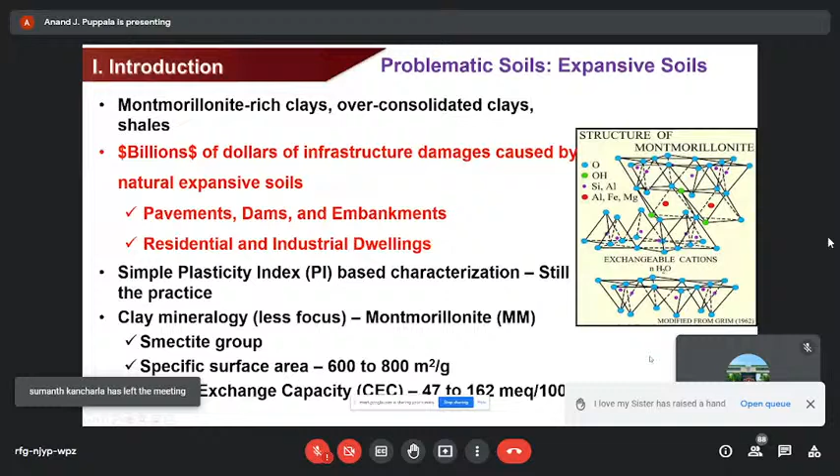So these are some of the infrastructure damage you typically see. And most of them are coming from the Texas area, because we are sitting right on top of expansive clay soil. So we have a lot of damage here. Road cracks can be this wide. It could be anywhere like 5 to 7 centimeters, and then it can go up to almost 0.6 meters or even higher. Whenever the rain hits this area, the water goes into the cracks and causes huge amounts of failures.

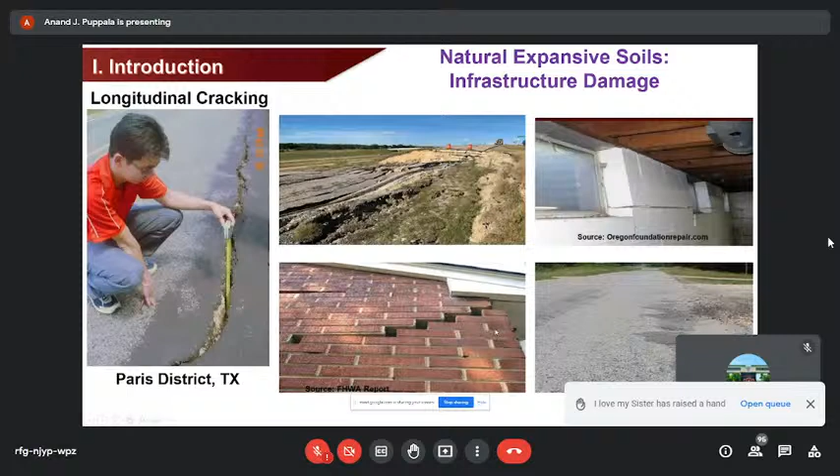And you also see in the home foundations, in the basements, and also masonry, significant differential swelling causes huge amounts of cracking, like you see here, the brickwork kind of moved, and then you have huge amounts of distress in your home. We not only have that issue, we also have it sometimes on the walls, particularly this wall, which is actually close to my old university.

As you can see here, when we had a huge amount of rainfall in a short duration, this whole thing got soaked under the water, and then it became like a frictionless soil surface. So this whole thing slid on top, and you can see that all these panels kind of broke and then came down.

And we also have a lot of areas with MSE walls. Even though behind the wall you have a non-expansive soil, behind that you have a natural clay, which can be expansive. So sometimes this swelling from the rain can cause movements of the walls. I have seen the walls moving into the roads, causing a lot of buckling of the roads. So this is also another major issue.

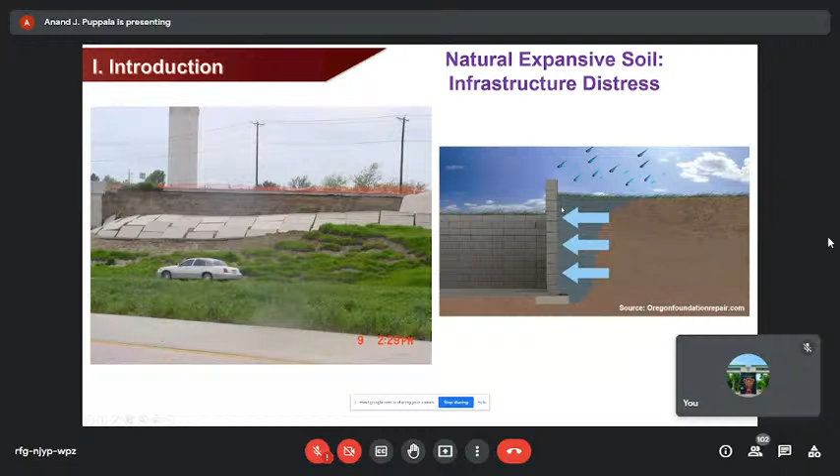So we need to understand what type of backfill or what type of natural soil you have. If that is expansive, you need to make sure that you have some compressible medium here, so the compressible medium will absorb the swelling of the back soil. Otherwise, eventually this will put movements on your structure, in this case the MSE wall, and that can cause huge amounts of failure.

And there are also a lot of dams in our region. What you see, this is one of the dams here. On both sides, you have a lot of slope failures.

And you see the slope failures are very shallow, superficial slope failures. Sometimes the slope failures take away the roads, like you see here. So this is a common occurrence because our soils are highly shrink-swell or expansive soils.

So in extreme summer, particularly from June to August, we have high amounts of sun and also high temperatures. It causes a lot of cracking, and then the rainfall that goes in causes these localized failures. And this is a major maintenance issue for the agency that manages this infrastructure.

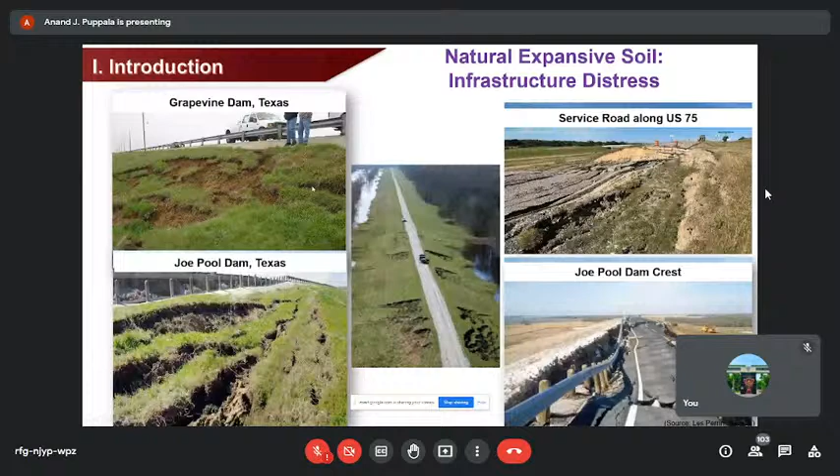So this is a TxDOT highway outside Dallas Fort Worth, and these are all the dams in Dallas Fort Worth. It's a common occurrence of this type of failure.

I also want to bring up another type of expansive soil problem. This is what we call sulfate-rich soils. Up to now, whatever we talked about is mostly smectite soils. But you may have a good soil, but if the soil contains sulfate, it's called sulfate-rich soil. This also causes a lot of problems, and this has been one of my research areas.

It started with Jim Mitchell's work. Then Dale Hunter did some work in Las Vegas. Then Dallas Little from TAMU and other people are working. And now we are continuing this work for the last 15 years, working on different types of sulfate sources.

Most of our soils are gypsum. Gypsum is calcium sulfate. We also have sodium sulfate and magnesium sulfate, which are the two other types. But the majority of the soils in our region have calcium sulfate, or gypsum. The problem with gypsum is it has very low solubility. It is a slow release of sulfates. It doesn't come quickly, so the problem can slowly start happening.

It doesn't happen overnight. It takes several days or several months, depending on how much rainfall dissolution is happening. So that is always important. One way you can tell if you have gypsum is that gypsum looks like crystals, almost like diamonds. You put the soil against sunshine and it will shine. This is one way to know whether you have gypsum in your soils.

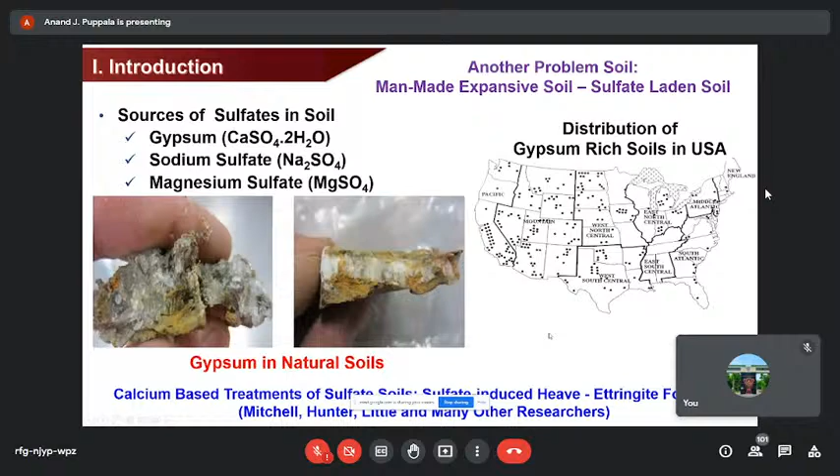So if you have this gypsum material and you stabilize with lime or cement, they form a compound called ettringite, and that ettringite is a heaving mineral. So soils that are naturally low expansive will become expansive just because of your chemical treatment reacting with the sulfates.

You can see here, in this area, a lot of sulfates, the white stuff, and this one here. When you stabilize the soil with lime or cement, the soil starts heaving because the gypsum causes a reaction forming ettringite. You can see some of the pictures here.

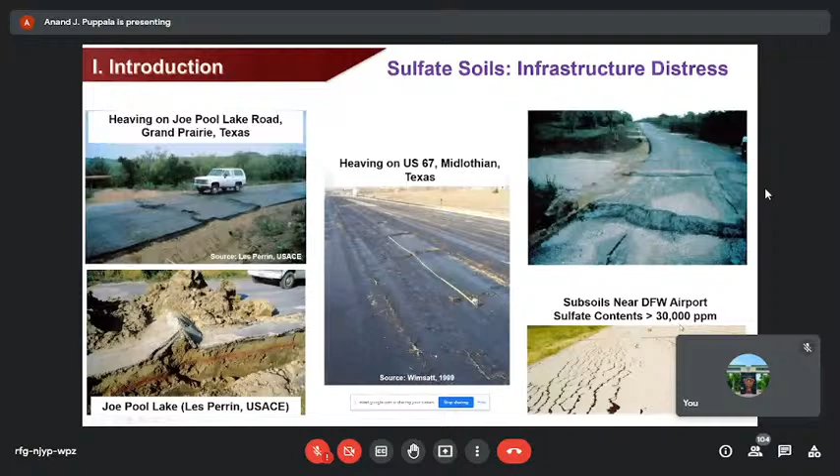And this is actually the taxiway of an airport. This probably also got this problem. In this area, we found very high amounts of sulfates. So this is also a major issue.

I told you we always use PI to see whether the soil is high PI, highly expansive. But I mentioned several times that the same PI doesn't mean they're the same soils. Here there are two soils. They have similar PI, but you'll see that they're different, and one soil is actually stronger than the other even though they have the same PI. If you look at liquid limits, they're different.

But unfortunately, we rely on PI, not liquid limit and PI. There is a liquidity index, and there are other types of parameters you can use. But folks simply use PI-based charts or PI-based equations, and that is going to give you misleading results. On the other side, we also have two soils with similar PI, but look at the liquid limit and plastic limit.

So a couple of my PhD students, almost 15 years back or so, we started working on this fundamental soil chemistry. We looked at the clay minerals. We looked at the soil porosity. And we also looked at the unsaturated soil properties using the soil water characteristic curve, which is a relationship with your soil suction, and that is very important because most of the expansive soils are in unsaturated conditions. So then we also connected all these things into some swell properties.

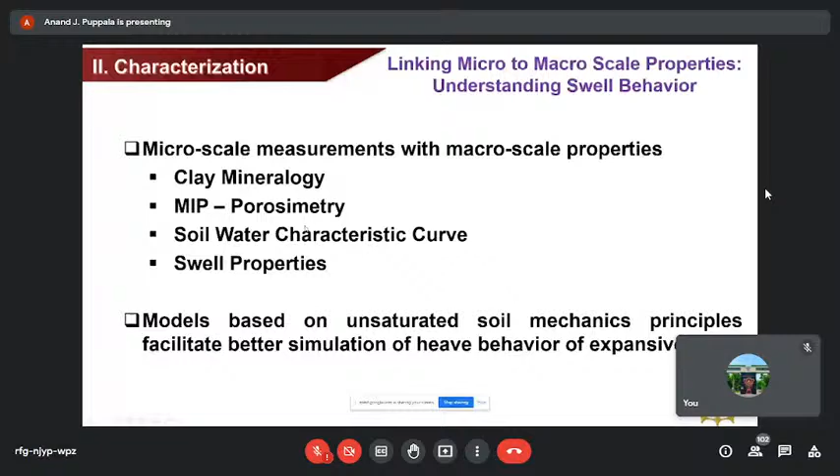Several papers are published on this. I'm not going to talk about them, and we have developed some interesting models combining them. Obviously, using these tests, you have to spend more money, but these will provide you better understanding of how expansive your soil is. So this is basically from Jim Mitchell's book. Everything can be linked to composition and also environmental conditions.

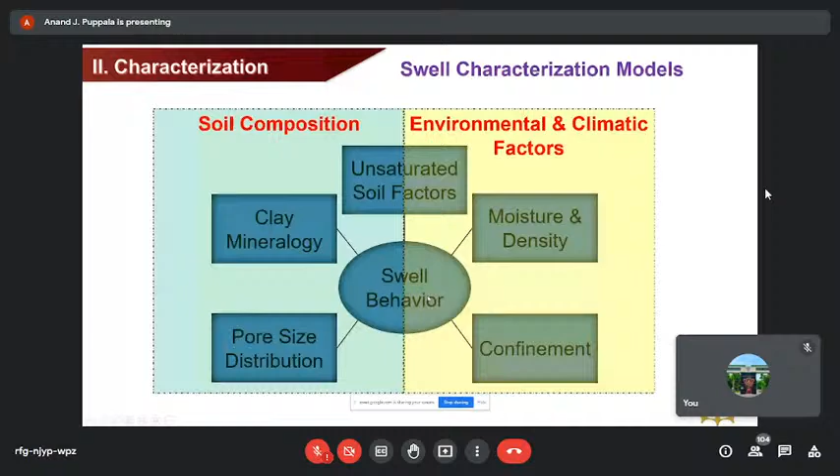So here is our composition of soil types. Here are our conditions outside. Together, they result in different swelling patterns, swell behavior. So combining all of them will be a challenging one. So we tried to come up with a very nice framework where we took the soil, and the soil has sand and silt, and these are non-clay.

This is clay. Even though there are a lot of other minerals, these are the three dominant minerals we consider: kaolinite, illite, montmorillonite, and we try to explain them in a simple way, doing some chemical analysis using these three methods: cation exchange capacity, specific surface area, total potassium. If you look at this paper by Bhaskar Chittoori, published in an ASCE journal in 2011, you will understand how to measure this. Some of you are probably already doing this work.

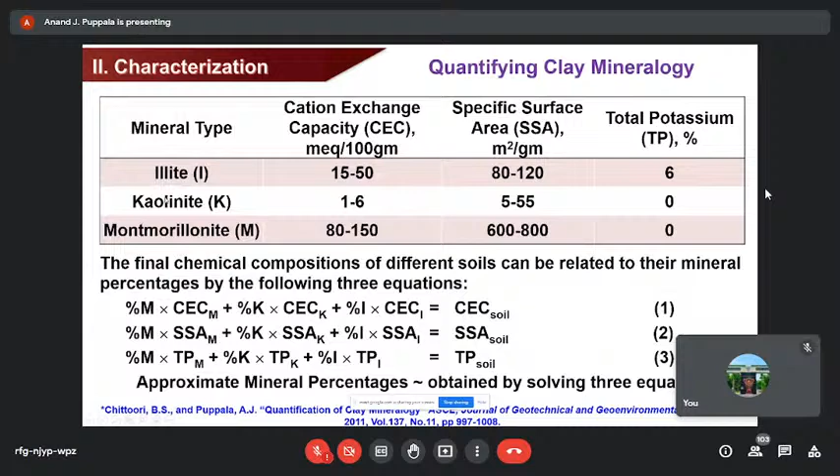So basically, it's three measurements, three unknowns. So you should be able to solve for the different clay minerals. That will give you an approximate, not exact, but that's more than enough. An approximate idea of clay mineralogy in a soil will tell you whether you have too much montmorillonite, or low montmorillonite but high kaolinite. These things will help you understand how much swelling you have.

So we took this information and came up with a chemical mineralogy parameter. You can look into the papers. I'm not going to explain everything; it will take some time. So we gave some mineralogy factors. High swelling, we gave a very high number. Moderate swelling is like a 9. Low swelling is given as 1. So we use these factors. We call it SF, or swell factor. And we multiplied with this equation to come up with what we call a chemical mineralogy parameter.

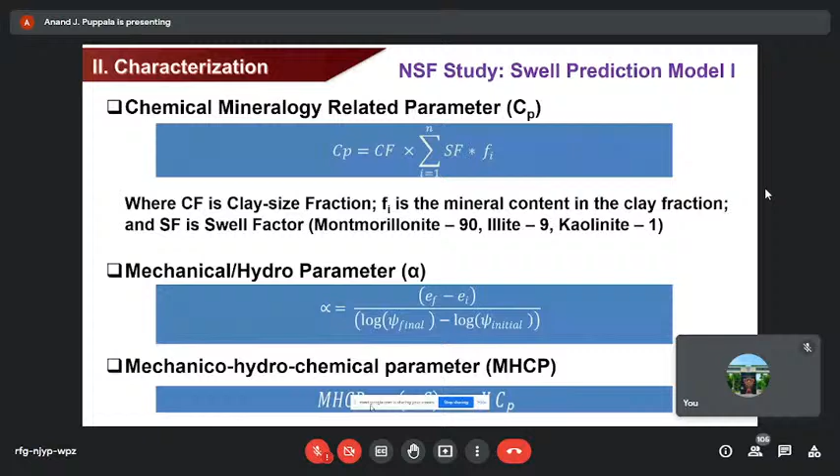And then soil suction, we gave something called a mechanical hydro parameter. This is SWCC, so change in void ratio with respect to soil suction. This will drive how the flow will happen in the soil, because you need moisture flow to induce swelling. And then by combining these two, we came up with a mechanical hydrochemical parameter, MHCP.

We tested several soils, measured these parameters and measured swelling. And there's a good trend. It's not the best R square, but 0.7 is pretty good for geotech. So this is one of the ways we compared them. This paper is published in Engineering Geology. So it's an empirical swelling model.

Again, if you can measure this, it'll give you a better idea of what swelling soil you're dealing with. And we not only measured swell strain, we also measured volumetric strain at different confining pressures, like 7, 50 and 100. So you can see these models we developed are much more fundamental; the soil behavior is incorporated. So they're much more robust and stronger, better in my opinion.

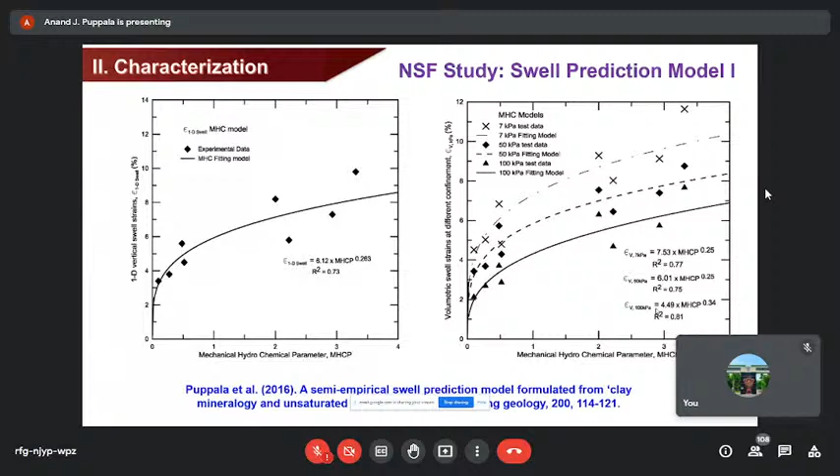So we have developed several models. There's another model, we call it a surface area ratio, because of how much surface area is exposed to the moisture. We came up with a TSAR factor. This paper is also published in the ASCE Journal of Geotech, and this is Aravind. He was my PhD student, and he worked on this for his PhD. And we came up with another model, and it's an interesting model, gave pretty good results.

So this takes extra work. That means you really have to do more chemistry, soil chemistry work, and also some suction testing. But adding more testing is important if you want to know what type of soils you are dealing with, particularly if it's a problem soil. So don't try to solve a problem soil design by doing a simple plasticity index testing in the lab. Just take it in this way. If you have a very problematic condition, you want to invest in some testing. Don't try to do a very simple, cheaper technique.

I remember Professor Madhav used to say Geotech is like health, like a doctor. Same thing. If you want to know what is the problem of a soil, you want to spend a little more on good testing. Like sometimes a CT scan, that type of testing. In this case, particularly what you see is mercury intrusion porosimetry. These are expensive tests, but they can give you a better idea of what type of soils you're dealing with, and that will give you a better design.

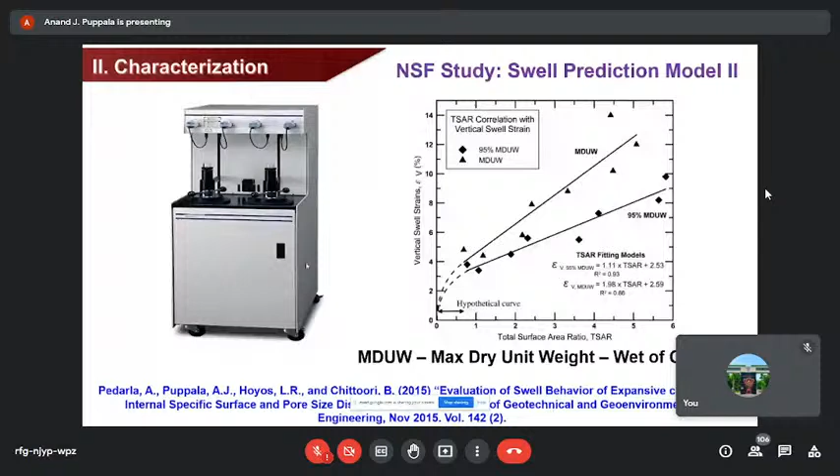Sometimes you get this: we want you not to think in an academic way, we want you to do it a much simpler way, don't spend too much. But then when there's a failure, you will be liable. At least in the US that is a big issue for us. So we need to be careful. We want to test as much as we can, and then use engineering judgment to develop our design. So for the young members listening, try to do more robust experimental work that will give you better confidence in the problematic nature of your soil. Do not try to do a simple thing.

At this point, I just want to mention, this is Professor Ralph Peck. I know Balakumar mentioned him, we talked some time back. He's considered one of the great practical minds. This is one of his quotes: translating the findings of our research into simple concepts and procedures for the guidance of the practicing engineer, in my opinion, is a duty and worthy activity of the profession.

So remember, whatever you do, you need to convert that into practice. Don't just write papers and leave it there. You need to show how it can be implemented into real practice. This is what we call translational research. Everything we do needs to be connected to the design of infrastructure at real sites. That is where you really need to spend effort on these topics.

At this point, I'm going to show you a couple of studies that we are doing on expansive soils, which will give you a good idea of how we are dealing with them. This study is about pavements, roads built on expansive soils, in an area about 45 kilometers from Dallas. Typically when we have expansive soils, we use chemical treatments, mostly these materials. And we also use geosynthetics, like geocells or geotextiles. These are different methods that are typically practiced. Some work very well, some have issues.

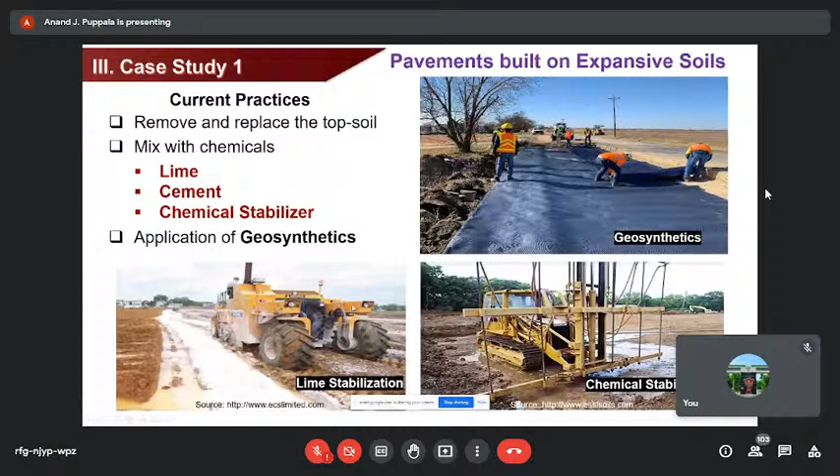We got a project with the highway agency. They want us to know why in some cases it works and in some cases it doesn't. That means if I use chemical treatment in some soils, no issues. Everything works well, the road is perfectly uniform, there's no heaving and cracking. But in some cases, it is an issue. So in the study, we took soils from different parts of Texas, and for each soil we identified how much montmorillonite, illite, and kaolinite using our Dr.

Chittoori's method, the one he developed with the CEC, specific surface area, and potassium. And we approximately identified them. So the ones that you see in the red color font here, like Austin, Fort Worth, Paris, and Pharr, you can see these have high amounts of montmorillonite, close to 50%. This one is 48, but all others have above 50. The ones that are below, we put as dark numbers.

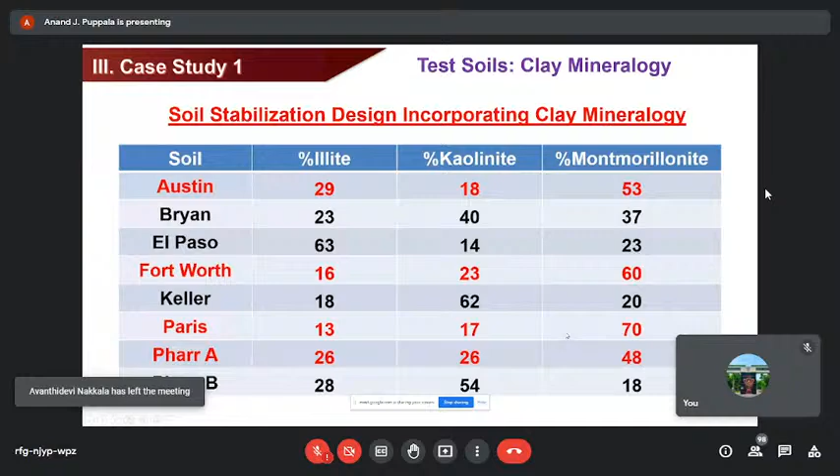And if you look at the liquid limit, obviously the more montmorillonite you have, the higher the liquid limit. So you can compare these two to know that this soil is not as expansive, even though the PIs are similar. So this is what we are trying to tell you: try to use a little bit of chemistry or chemical testing that will provide you better understanding. Using the concept of PI and liquid limit will also be helpful.

It's the same thing with Paris and Pharr. Again, 36, 37, this soil has montmorillonite, whereas this soil has kaolinite. The reason why I'm saying these minerals is you will see later the Bryan soil has no problem when I stabilize with lime. Whereas the Fort Worth soil, if I stabilize with a moderate lime dosage, did not perform well in our testing. So if I know the mineralogy, I will understand it. And that explains why in some areas we have premature soil failures, whereas other areas we have no issues.

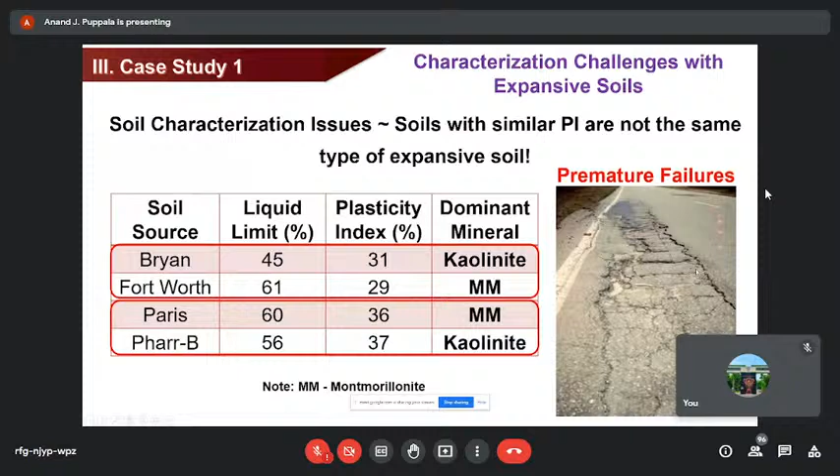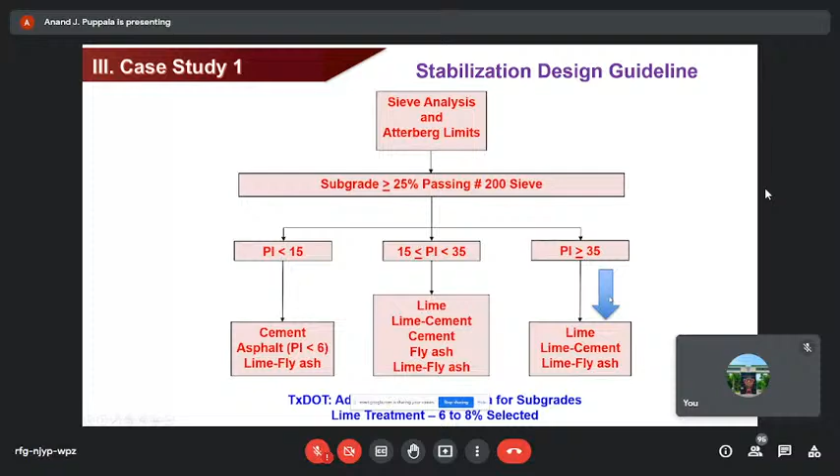So one of the things we did is we looked at the stabilization design. We tried to look at lime treatment using this chart, looking at the PI number. So we used lime as our stabilizer. There's a simple Eades and Grim method you can follow. But one important thing we did is once we stabilized them and prepared samples, we tested them for durability.

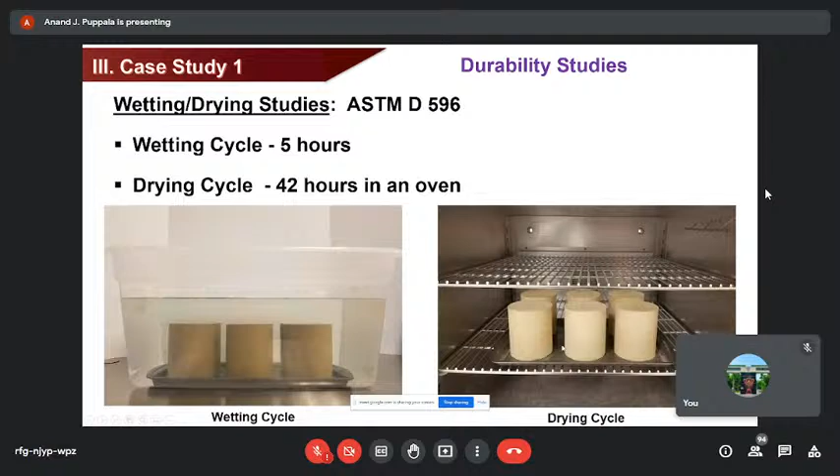For durability, we followed the ASTM method D559, which includes 5 hours of wetting followed by 42 hours in the oven. One complete wetting cycle plus drying cycle is considered as one cycle. Okay. So here is our soil that is untreated. This is the Fort Worth soil. Untreated won't survive too much. Within one cycle, the soil started crumbling.

You can see this is wetting. This is during drying. You can see how much shrinking is happening, you can see cracks. The minute we wet it the next time, it started crumbling. So this is obviously untreated, there's no strengthening. The same soil, when we treated it with 6% lime, worked okay up to 10 cycles. After 10 cycles, it failed. Remember, this is the soil that has montmorillonite in it.

So if your threshold durability is around 21 cycles, or you can establish the number of cycles, this one didn't even go halfway. It failed before that. Because of montmorillonite, this soil only worked for a certain time. In the beginning, it performed well. But with seasonal changes, within a few seasons, you will see a sharp failure. And that is what we learned: looking at the mineralogy and comparing with the durability, we were able to explain what is causing the problem.

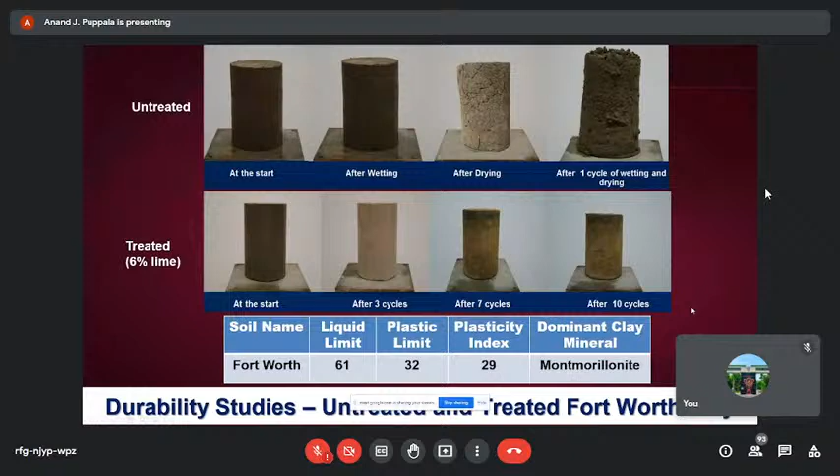But one interesting thing is lime actually failed within around 12 plus cycles, whereas cement actually went all the way. One reason is cement provides more unconfined compression strength, so the increase in strength is helpful in reducing the whole thing. So this is the summary of all our testing of durability.

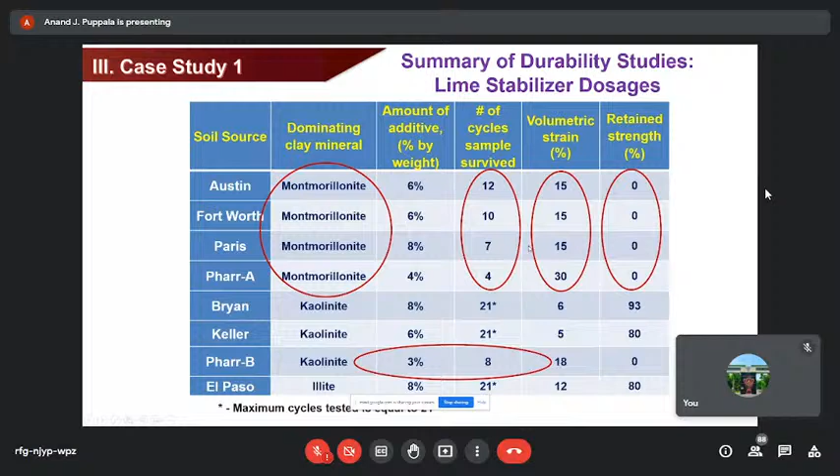So that tells you that for soils that are rich with montmorillonite, you really need to do much higher stabilization or even consider other things. Otherwise, you will have certain swelling problems. So that is one of the things we learned. And then we came up with a modification: check the montmorillonite amount by doing some chemical analysis. If you do have too much montmorillonite, try to increase your dosage, add more chemical dosage. That's not necessarily a good sustainable solution, but you have to increase your strength so the soil won't collapse very rapidly.

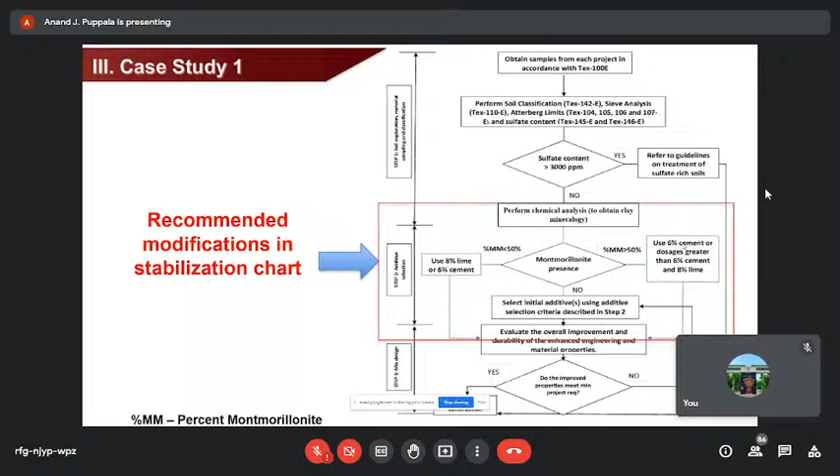So this is one of the things that we tell them. You have so many roads that fail; many countries have this issue. They just use a thumb rule: this PI, go with 6% lime. In many cases, it works because maybe the soil is not necessarily rich with montmorillonite. But in many places where there's too much montmorillonite, that 6% lime thumb rule doesn't work. You have premature failures. When you do this forensic type of investigation, you will know what the issue is. If you ever see any road that failed, particularly a stabilized area, there may be a clay mineralogy issue.

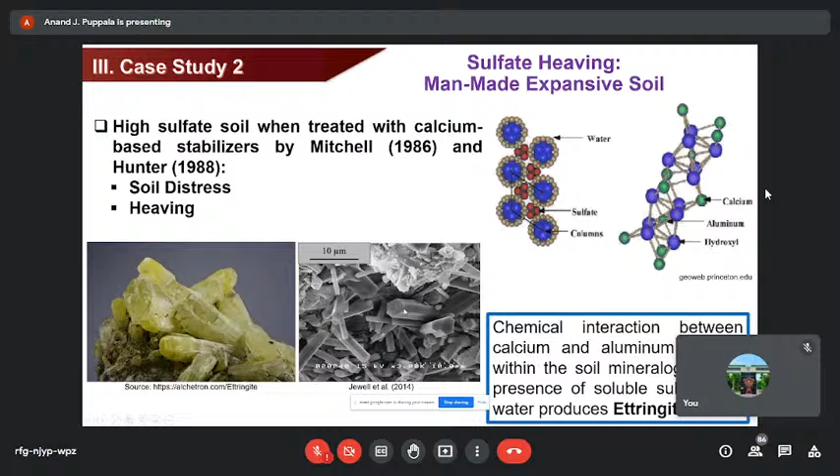The second case study I want to mention is more about sulfate soils, high gypsum. When they react with the calcium in lime and cement, they form this mineral called ettringite. So this is ettringite. It looks like needle-like structures. If you can see the shape, it looks like a hexagonal shape, long needle-shaped structures. So this is the chemical reaction.

So you have your lime reaction. This is your lime, hydration of lime. It releases calcium. And then you have the soil. Whenever you put lime treatment, your pH will start going up. At high pH, your soil starts releasing alumina and silica. Many times these are good things because these are the ones that form your pozzolanic reactivity compounds.

But unfortunately, in sulfate soils, you can see in the last equation down here, you have calcium from lime, alumina from the soil coming from this area, then you have sulfates in the soil. All three, in the presence of water, produce this long equation here. This is nothing but ettringite. Ettringite swells; it bulks up 2 times its volume. Anytime you give water, it becomes like a sponge and swells so much.

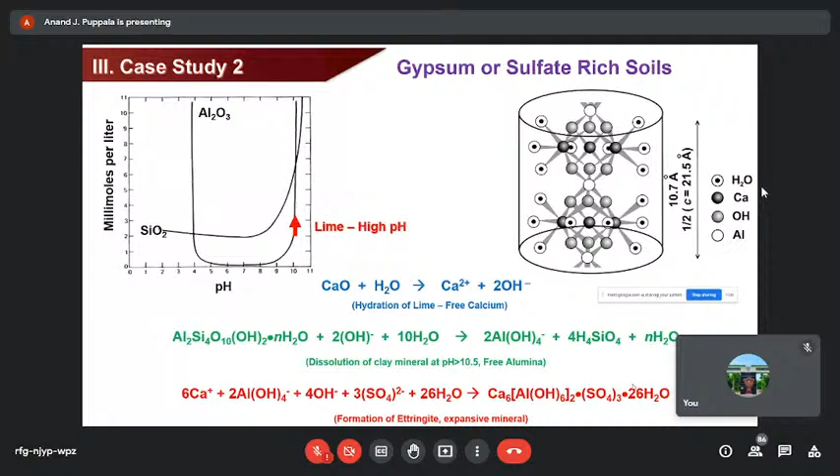So in a soil that is rich with sulfates, when you stabilize with lime, lime is typically supposed to suppress swelling, but instead of suppressing, it actually compounds the problem. That is one thing I would like you to know, that this is an issue. We have been working on this for several years now. I have documented all the various case studies.

In many places we found out ettringite is a big issue. And the other thing is, in some cases it happens within weeks to months, and in some cases it takes years. The reason for that is, as I just told you, gypsum has a low solubility. If it's dry, it doesn't release. But if you have too much rain, that's when it starts coming out.

Gypsum produces sulfates, so that is what's needed. And once you form the ettringite, you need to form more and more. It needs to grow. Only then will you feel this heaving. Suddenly, in some cases 6 months, sometimes a year, sometimes several years, you start seeing this ettringite attack. We call it ettringite-induced heaving, also known as sulfate-induced heaving.

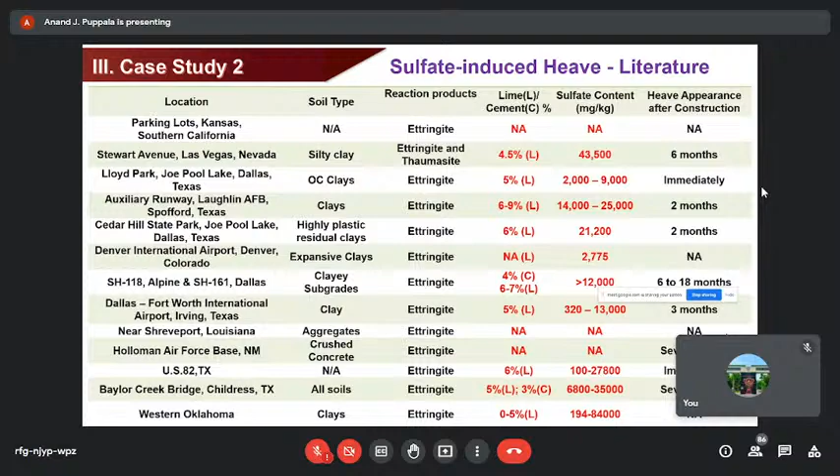So we are very well known in this area. We have published quite a bit on this topic. I divide them into 2 types. One is low to moderate sulfates, I would say 8,000 or less. The other is sulfates more than 8,000. For the first, we have done a lot of studies all over the world with different materials like double liming and fly ash. All these things have provided some good results. We have good information on what works for these levels of sulfates.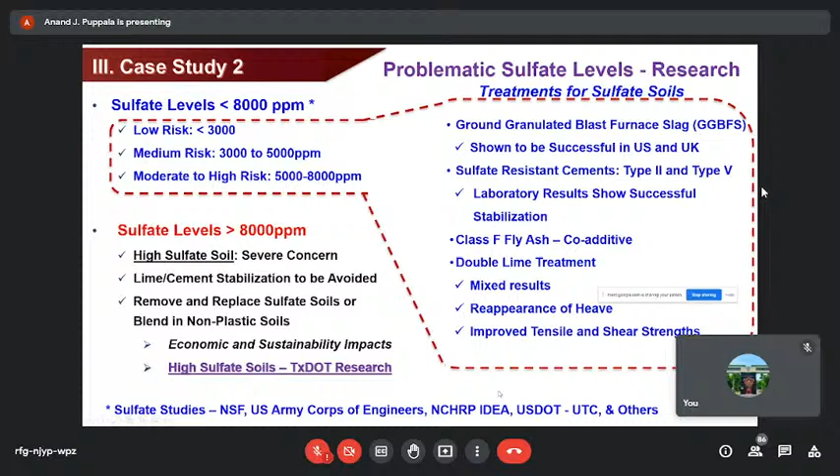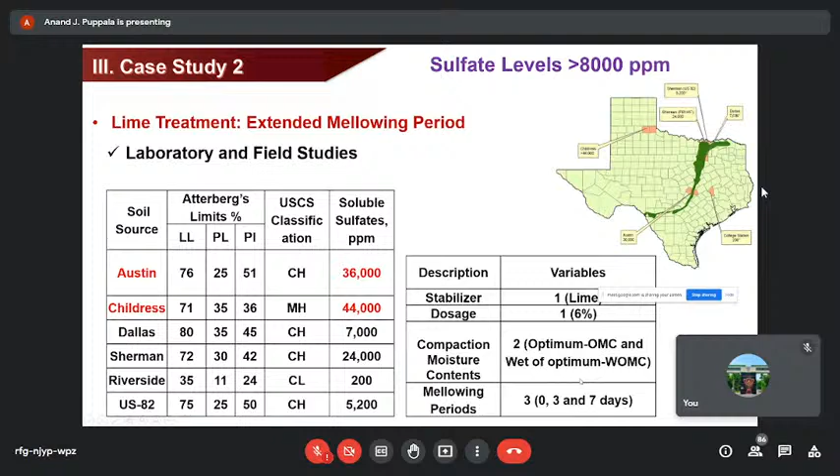So we did 6 different soils. You can see the sulfate levels. Some of them have lower sulfate, but we spiked them by adding gypsum, so that way we got more than 8,000. We added extra for these 2 soils and this one also, so we increased our sulfate levels. In each case we tried lime at 6% dosage, and then we tried different things. One thing we did each time we tested was try different mellowing periods.

So what is mellowing? Mellowing is when you initially mix the lime and the soil, mix everything, and then leave it for a certain time. Typically they do it anywhere between 0 to 24 hours, so that is like 1 day. But we wanted to leave it for 3 days and 7 days, then come back, mix it, compact the samples and test them for swelling. So here you see the 3 mellowing periods we studied: 0 day, which is immediately, and then 3 days and 7 days, this extra mellowing.

What happens is during 3 days or 7 days, the ettringite forms, but we go back, mix them again, and recompact them. So here you can see 0-day has much higher swelling, but with increased mellowing, the swelling starts subsiding. So this is one of the methods we use in the field. When we stabilize with lime, we keep it for 3 days. Contractors do not like it; they like to do everything within a day or two. But if you have sulfates, you have to wait for some time. This is one of the things we learned.

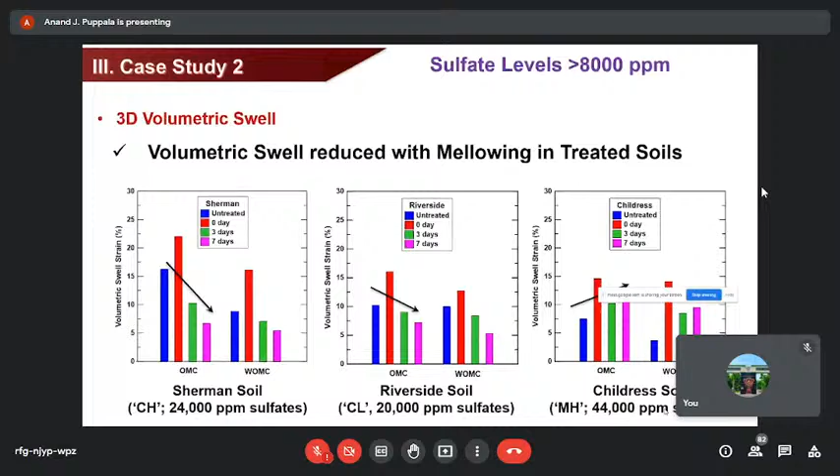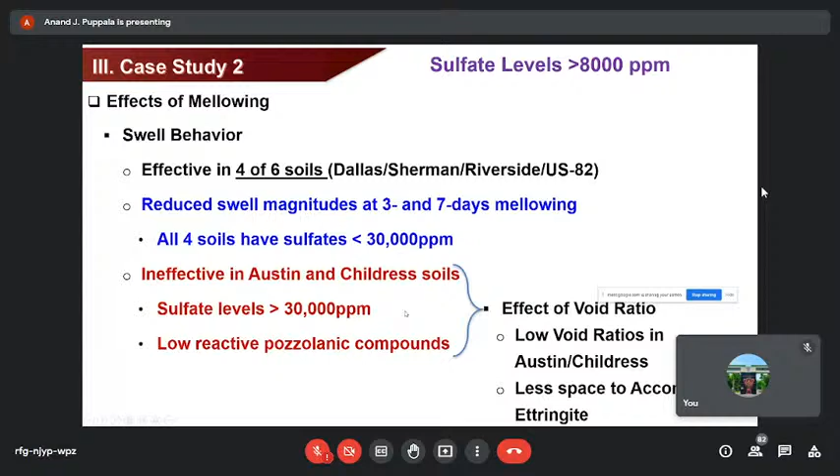Mellowing can reduce it, but it only works up to certain amounts. If sulfates go above 30,000, we found it's still going to be a problem, as you can see here. There's always a limit. So for anything above 30,000 parts per million, you need to remove some sulfates from the soil and then stabilize it. Otherwise they will always cause a lot of issues. We showed that any soil below 30,000 is no problem, but above 30,000 we have an issue with soil sulfate reactions causing more heaving.

And we even studied this in the field. This is a section almost 80 or 90 miles from where our university is, UT Arlington. That's where our students did some work. These are test sections.

We prepared them with the different fly ashes and mellowing, and we monitored and found out that increasing mellowing, reducing lime, and adding some fly ash actually helped in reducing sulfate attack. Okay, so there are ways you can do it. So this is one of the sulfate soil studies we have done.

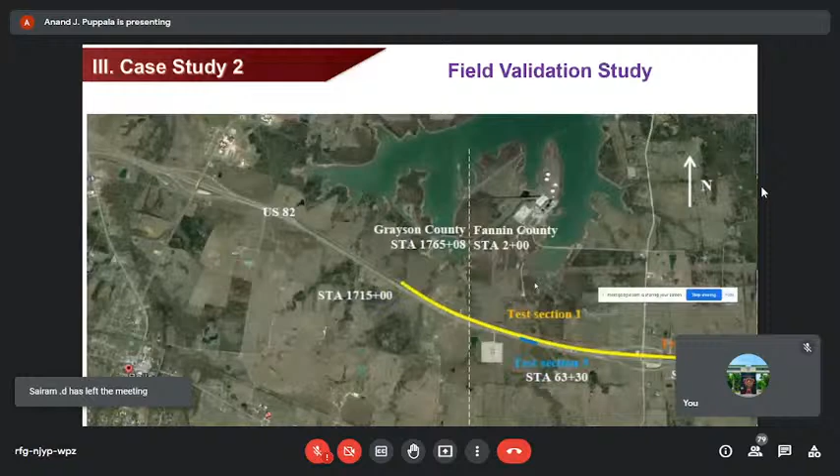So this is in the field. We prepared one, as I mentioned, lime plus fly ash, and this is the section with the extended mellowing. These are our students actually collecting data in the field. We are monitoring the heaving on the highway. These are construction pictures. You can see here, this is the UT Arlington picture. That's where this work was done at that time.

And we have collected a huge amount of data, and basically this was a very successful project. We have shown how we can stabilize high sulfate, above 8,000 up to 25,000. Anything above 30,000, we have to come up with something new. Fortunately, we don't encounter that type of very high sulfate soils too often. At this time we try to remove the sulfate pockets. If they are pockets, they're not everywhere, so you can do that.

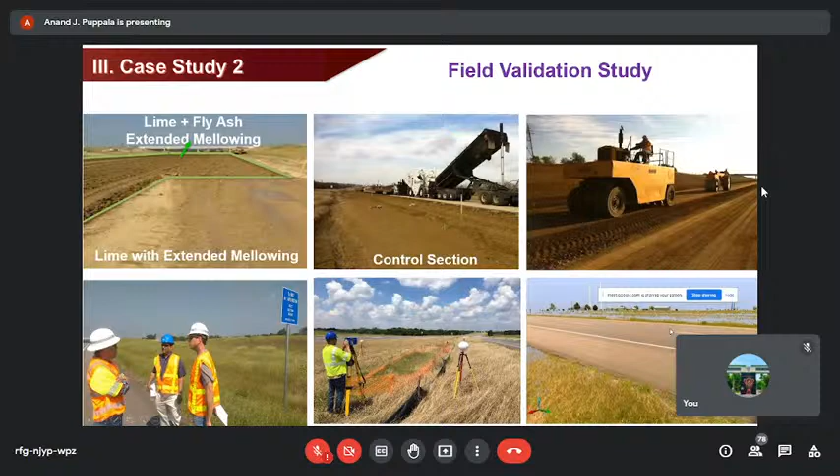So I'm going to move to the final topic, and this is where, as I said, I'm from Vizag. I live next to the beach. The coastal environment is causing a lot of issues these days due to climate change in different regions. We're having a lot more rainfall events, more flooding, more hurricanes, and more typhoons. Just name it, everything is happening.

As you see, even in Vizag recently, a huge amount of rainfall causes a lot of erosion. I've seen recently that a lot of this erosion sometimes takes away the roads or even the buildings that are placed next to it. And these are some of the pictures in the US. You can see the whole pavement next to the beach area during the flooding. It damaged everything here.

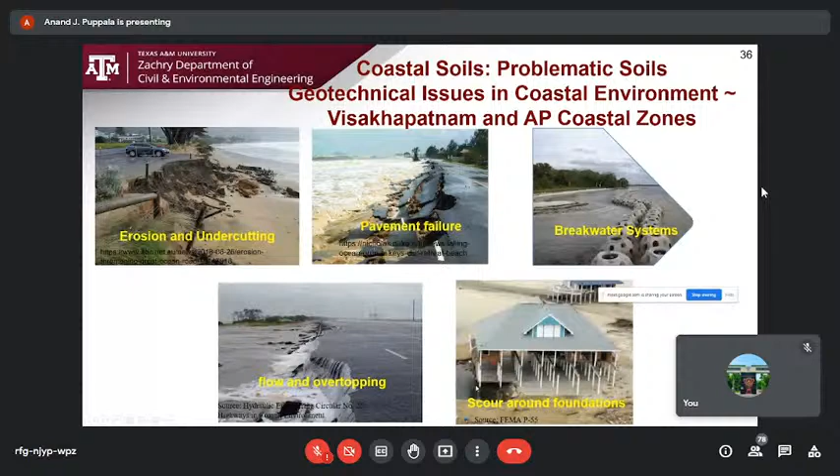They try different breakwater systems and energy dissipators. This works, but these are expensive. And there are some places where you have overtopping. And sometimes homes that have deep foundations get a lot of scour like this, and that may cause the structures, like the homes, to collapse. So these are all kinds of built environment issues, and we've been working on this topic.

We were recently funded by the National Science Foundation, NSF. Maria, a faculty member in our department, is the lead on this NSF-funded research hub, to study how to increase the resilience of underrepresented coastal communities. If you look, this is Texas, Louisiana, Mississippi, Florida. In all these coastal regions, communities are impacted by hurricanes, flooding and erosion issues. So we are trying to come up with a way to increase the resiliency of infrastructure.

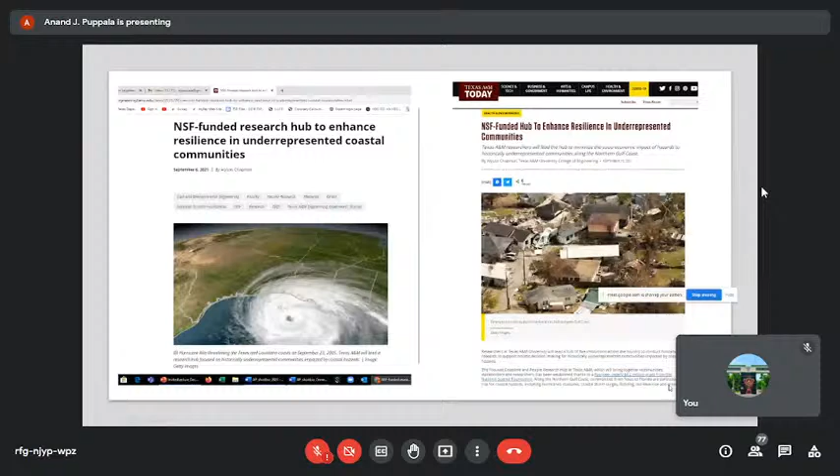So this is a major project for us, around $4.2 million in NSF funding. I'm working on the geotechnical aspects of this project. One of my students, Mani, put all this information here. We identified several types of issues, particularly sea level rise, that is, increased flooding and erosion. Plus, seawater can intrude salt water into the soil. That's also a major issue, and subsidence is another major issue, particularly in outer harbors.

And flooding is a major thing: the type of flooding and the wave loading, particularly during the storm, the amount of force acting is important. Some soils can stay, some soils are not going to stay. The ones with low unconfined compression strength can be easily eroded. So erosion and scour is a big issue in our pavements and also homes built there. As I mentioned, the wave action and loading is important, and this is indirectly connected to all of these erosion and sea level rise issues.

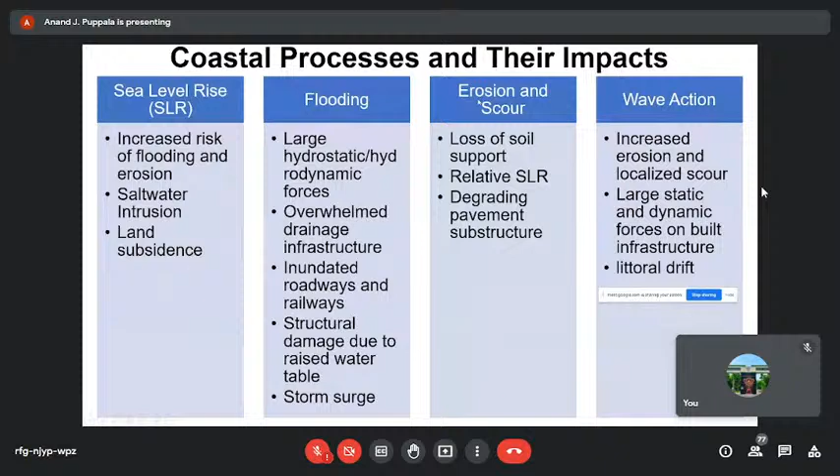So I'll show you a little bit about the work on pavements. Anytime you have a highway pavement here, a typical coastal pavement, you have waves coming and then flooding, and then you have homes and everything built here. So we want to see what type of things we have to monitor and what kind of designs we need to do.

So this particular subgrade and base layers will support during the flooding and during the sea level rises. It will provide very good support. So one of the things we are looking at for pavements is the performance of the pavements using some non-destructive testing like LWD, lightweight deflectometer, falling weight deflectometers, and profilers.

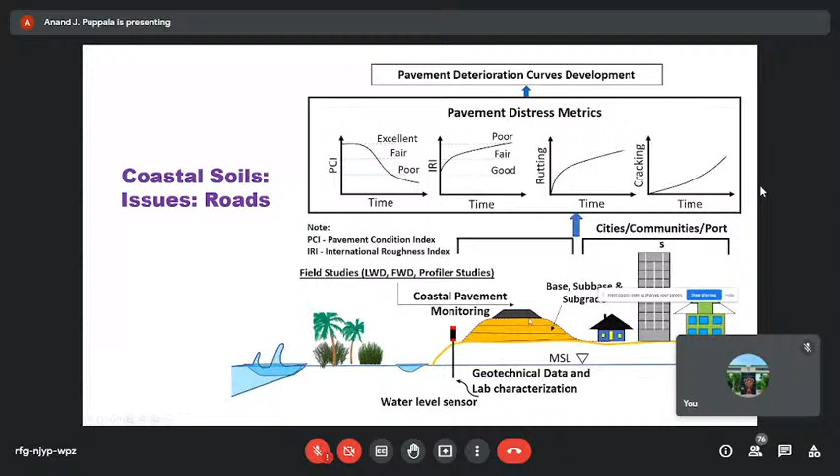And we want to check these pavement parameters with time and see different types of treatments we're doing. Some of them are nature-based techniques, some of them are stabilizing with cement and other types of things. All these things will provide very good resiliency, meaning a stronger pavement without being subjected to failure. So we are trying to look at different types of treatment methods, adaptation strategies.

And one of the things I want to mention is protecting these structures. If you have roads next to the beaches, what do you have to do to protect them from damage? You can do it during flooding, or under normal conditions. Normal conditions are generally safe, but the worst case scenario is when you have flooding coming from a cyclone event or a hurricane event, whatever it is. That's when you need to come up with a method.

So there are different things that we study nowadays. A lot of people use hard revetments, use seawalls. Like in some areas in Florida, they built seawalls, so the sea level rises will not let the water go to the other side where the infrastructure is. So they try to protect them. Some kind of hard revetments they also do.

And some people use soft technology, soft engineering solutions. They're more like what we call wetlands. They use marshes and different types of natural solutions. They're also providing very effective engineering solutions. So this is what we call protecting our infrastructure from getting damaged. And there's a lot of work going on in these solutions, and this is something we have been working on quite a bit now.

And we also like to say accommodate. That means elevate infrastructure above flood level. If we know the highest flood level, we want to raise that infrastructure with maybe pile foundations or something, so we raise the elevation of the slab or the floor. This is very common nowadays in these areas. And if you are building roads in that area, we want to use drainable soils, materials like reclaimed materials that will provide drainage, so there's no prolonged flooding. And we are looking at them.

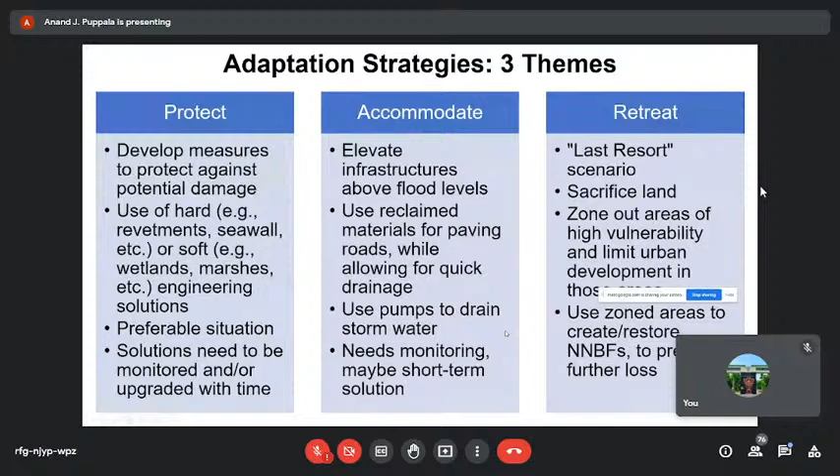And in fact, at the next IGC, I'll be working with the IGC Kerala folks. We're doing an Indo-US workshop on this coastal corridor: how do we come up with ways of reducing the damages coming from coastal flooding? So that's the topic I'll be on. Please stay tuned for that one. It's going to be next December in Kerala, hopefully in person.

So this picture, I just took it the day before yesterday. I was going to one of the locations there. I really liked it because this is an area I was told has a lot of erosion. You can see the material washed out. Of course, this is one of the oldest techniques, but it works reasonably. You can see these are trees, what we call shrubs. They were using them and put them from one end to the other end.

They put the soil and then they compacted it. And you can see these things are going all the way on the other side. So this is like long sticks with sometimes vegetation. This provides a temporary relief without any issues. And again, it's simple and cost effective. You can go back and repair it.

Again, these things were done in the past and we're still doing it also. With the geosynthetics, of course, more costly, but this is something we've been doing. And I like this thing because this is where ideas will generate. We know a lot of what we call jute type of reinforcement technologies, other things to cut down the erosion issues. This is something we have been doing.

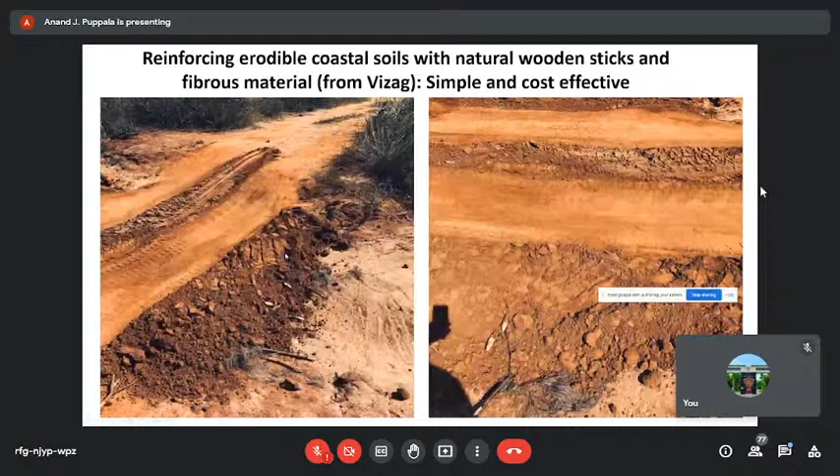Again, these guys who are doing it are not necessarily engineers, but they know what works. So we can learn from them. This is what we call a natural solution. One can learn from each other. And it's also very cost effective. Even if it washes out in the next rain, they can go back and put it back very quickly. Whereas if it's a geotextile or a geogrid, it's something more costly, but of course it probably won't fail. But that is something we have been looking at.

So the coastal soils and stabilization of them is a very hot area right now. And I think it's because we are seeing increasing intensities of hurricanes and cyclones and all kinds of them. Then the amount of flooding is becoming huge. We know that part of it is climate change. Sea level rise is an issue. We already recognize that. And also salts coming from coastal water, intruding into the soil.

Salt intruded soils are not good for stabilizing. They actually don't work very well. And then prolonged exposure to flooding causes soil softening. So we were looking at all these things causing a lot of problems, not only to the roads and bridges, but also for the homes that are close to the coastal line. So there are ways we can stabilize them.

So this is one of the areas we are working on now, geopolymer treating some sandy soils. We have been working on the coastal sandy soils on this for our US Department of Transportation. We also are interested in breakwater foundation systems with geosynthetics. We are working on this topic from our NSF site that we have. And I just mentioned the new project.

One of my PhD students is working on how we increase the resiliency of the built infrastructure. We are studying fundamental causes of the problem, plus we're also looking at some adaptive mitigation measures. So together we're coming up with a holistic picture and also using some new things.